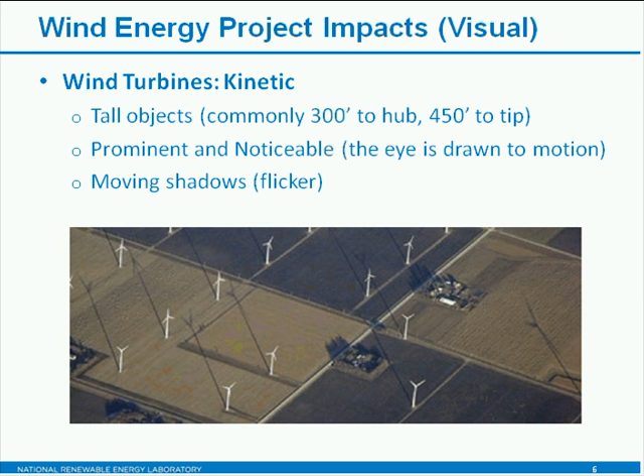As such, they also cast a shadow, and you can see these shadows can be long or short. At noon on a summer day, they can be very short and just oscillate around the tower, but around spring and late fall, the shadows can get quite long and cast a shadow that moves across people's property.

The good thing is we generally know where the sun is going to come up, and we can calculate with great precision where the turbine shadow is likely to fall in a certain area. This is a shadow map that shows, based on various colors, how many minutes or hours that shadow will be in a certain place, and it doesn't generally stray from this.

Then you get into the debate about what's the right amount of time for shadow flicker on somebody—sometimes it's zero, sometimes it's 50 hours. It depends on who the resident is, what the local guidelines are, and whether the person with shadow flickering on their house is involved with the project.

So a farmer who has that turbine on their property may be quite happy to have a shadow flicker, because every revolution, every shadow passing is another few cents, and it's a constant reminder that they're getting something for it.

So the mitigation for the shadow is proper siting. Because we know where these shadows are going to land, we can predict them. We can then put these projects or the turbines and site them specifically to avoid flickering on someone's home.

The other one is curtailment. So if we need to get close enough to a house where it's going to flicker, but we have other drivers to be there, there's the option to turn it off while that shadow happens to be right on that person's property or on their house.

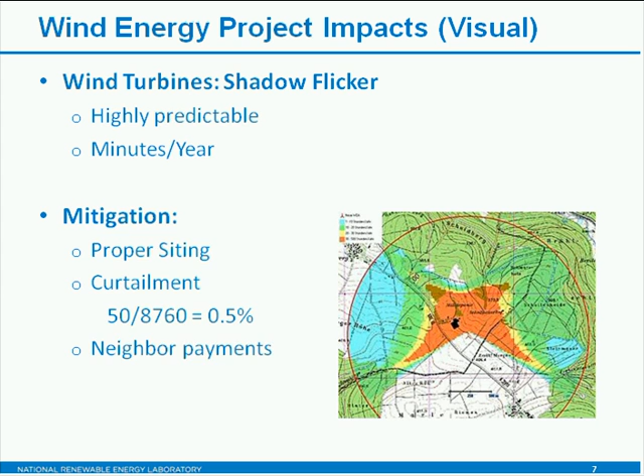So in terms of the machinery and moving parts of the wind turbine, there's a lot of components, and this cartoon hardly does justice to it, but it does highlight where the principal sources of sound emission come from. The bullets on the left are all the bits and pieces, in broad groups, within what we call the nacelle, Greek for boat, which houses the whole power assembly up top. That's where the principal noises are coming from on the machine side.

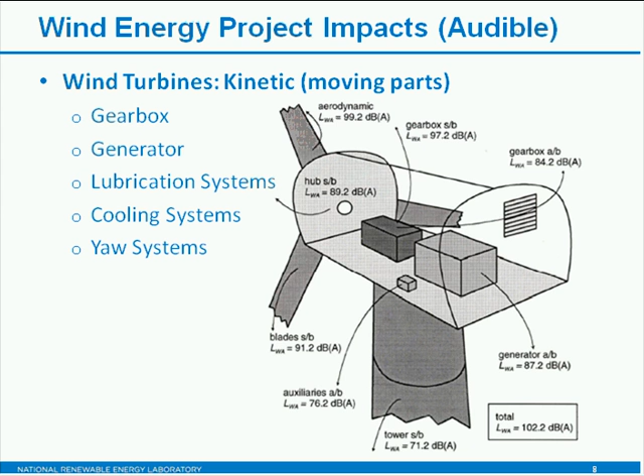And then there's the aerodynamic perspective. There are some cooling fans down at the bottom of the tower, but those are effectively inaudible. However, when you look at the system as a whole, because these emitting elements are so high in the air, 300 feet up, their actual contribution to the sound is relatively small. A big contribution to the sound is coming from the aerodynamic noise of the blade itself, and that's where a lot of the most recent research has come from.

That said, there are some things that when we look at a wind turbine, we don't even think about why it's designed that way. Why does it have 3 blades, not 5 or 2 or 1? These various design elements are actually all about sound - well, the first two are. And so the question of upwind versus downwind: turbines are upwind not because it's better, faster, or cheaper, but because it's quieter.

When the blade is downwind of a tower, there's this little wind tower shadow, and as the blade passes through that shadow, there's an audible thump. That was kind of a problem with early machines, which they mitigated to a degree using spiral figures on towers, or lattice towers and other elements, but eventually they just turned the unit so the rotor was on the upwind side of the tower.

Similarly, 2 versus 3 blades: 2 blades is a little cheaper than 3, but you have to spin the rotor a little faster to get the same amount of energy out of it. That means a higher tip speed ratio, meaning higher transport of the tip through the air, which is a little louder. So people have gone to 3 blades because it's quieter. It also happens to give a more even look to the eye, since it doesn't appear and disappear the way a 2-bladed rotor can, but really it's a sound issue that drove that design choice.

And then finally, the tubular tower, as we mentioned, that's an aesthetic choice.

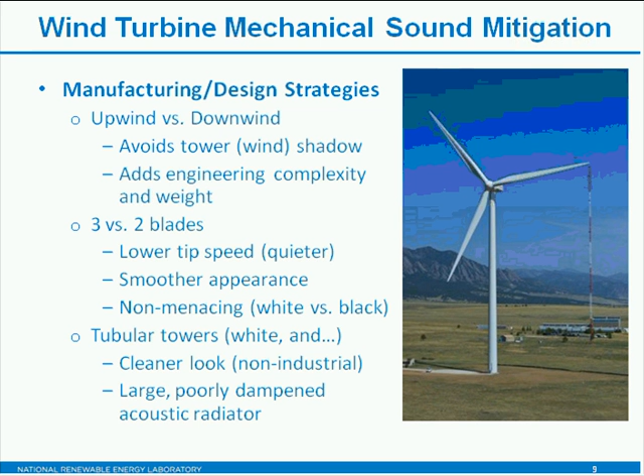And why would you do that? Well, when you see them from a distance against a distant tree line, you can't actually see the bottom of the tower against the trees. And there are those little measures that folks have done to get things going like that.

And then in terms of mechanical sound mitigation, these are interesting approaches that have been taken over the years that most folks don't even think about, but there's been a lot of effort put into how do we make these things quieter, because originally, as you probably are well aware, a lot of this development happened in Europe near people first. And near was like within hundreds of feet of a home, not thousands of feet. And so there was a lot of effort put into making these things quieter.

The first one was trying to figure out how to actually get the gearbox to be quieter, because the spur cut gears, which is in the bottom here of the two gears, let me just highlight them real quickly. This is a spur cut gear here versus the helical gear. Well, the spur cut might be less expensive, certainly for smaller gear elements, but it's louder.

And the way to remember this is that, you put your car in reverse, you're using a spur cut gear versus helical if you're in forward gear - it doesn't work so well with automatics, but it does a little bit. And you know exactly how much that machine whines when it's in reverse compared to going forward, and that's because you've got more teeth sharing the load in a helical situation. So there happens to be a fringe benefit with helical in that the gearboxes last longer, but they're also quieter.

We've also got these various isolators here, and this is a cartoon of a vibration isolator. And these we see all over the world, but we use them for attaching all the moving mechanical pieces to the bed plate and the other wind turbine components. And it's very effective at keeping the propagation of the vibration from entering the tower and acting as a large resonator.

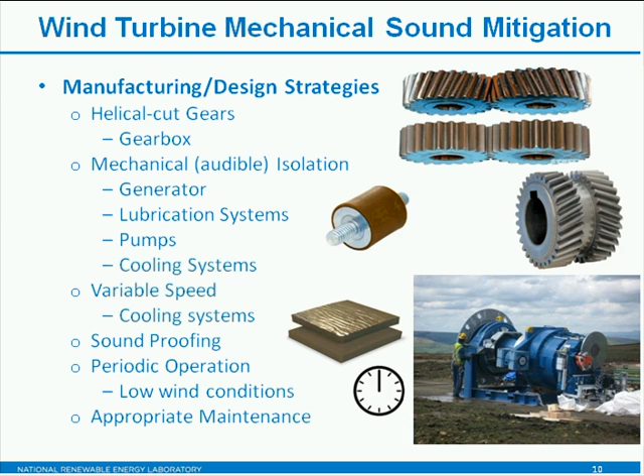And then appropriate maintenance. So there are certain elements of wind turbine that will make more noise when it's not properly maintained. But there's only so much you can do to reduce the noise from a wind turbine directly. You can't make it silent because it's a large kinetic machine. So one of the tricks then is to keep from upsetting the neighbors is to site it properly.

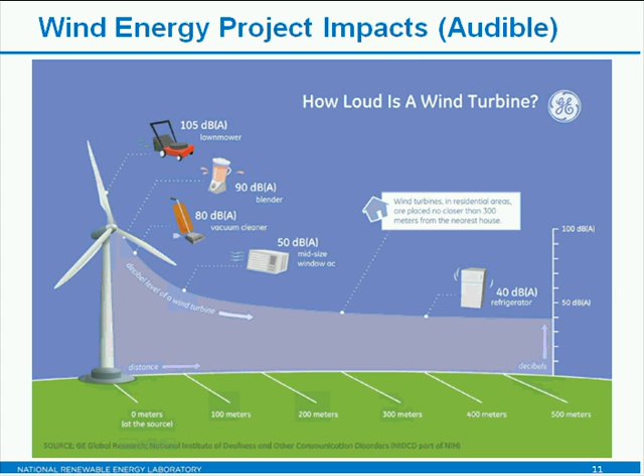And so we're looking to put these turbines sort of in where you get these diminishing returns. So once you get out a few hundred meters, then you're to where the sound level is pretty low and tractable, especially in comparison to background noise emissions. Most of you have probably seen these figures that other sources of sound emissions are, and we try to get it down to around the sound of a refrigerator heard from another room. So siting is really important, and sometimes you can't site it where you want to, and sometimes you can.

As I mentioned earlier, there are acoustic emissions from the blade itself, and the noise emissions from the blade go with the fifth power of the tip speed, the speed of the blade through the air. So by making a small change, like a 15% change in tip speed by lowering the rotational speed, which generally means making the blades longer, you can make the turbine quieter. A 15% drop in rotor speed ends up about halving the sound emission from that turbine. That's pretty good, but it comes at a cost, because now you have higher torque, since power is torque times speed. Lower the speed, increase the torque—you don't get it for free.

So people are doing that, and they also have low speed modes—when there are specific meteorological conditions where sound will propagate unusually far, some manufacturers will run the turbine at a lower tip speed at a certain production loss. In contrast, there are trailing edge improvements, and they've looked at various ones.

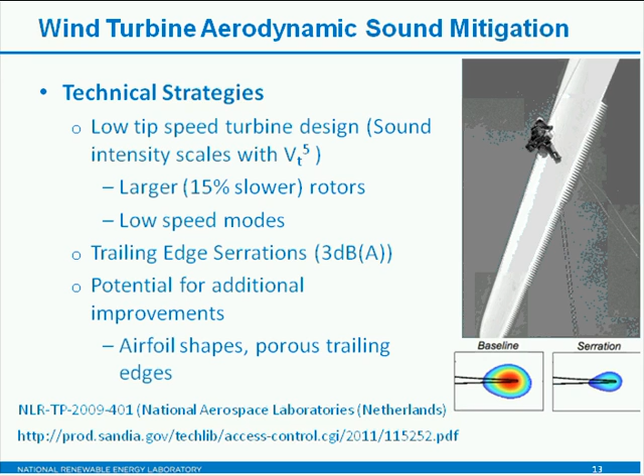I mentioned there are also conditions where sound propagates unusually far, and there's the human condition that we are incredibly perceptive animals—perhaps not as good as some other animals, but we can hear things a long way away.

The interesting thing is a lot of it has to do with our attention. If we're having a conversation with somebody, we'll miss somebody calling our name a few feet away. But if you walk into a restaurant trying to find a friend, somebody only has to barely whisper your name and you can hear them and find them. So a lot of that has to do with how you're feeling about the situation—when you're not connected to the project, you tend to be less interested in listening to it or seeing it. That's called the checkerboard effect.

You'll get one farmer who's quite happy with the wind farm and may be closer to a turbine than the next farmer, yet the more distant farmer is less happy about the nearby wind turbine—and that has a lot to do with being connected.

So that ties back to these interesting and innovative ownership models. Rick Vanderveen in Michigan has been pushing this model to good effect, where you come up with a revenue distribution plan that's independent, to a degree, of actually having a wind turbine on your land, so that everybody can benefit from the project. We're seeing this in the Northeast more in the form of neighbor payments. Those creative solutions are really important to investigate when you can and when needed.

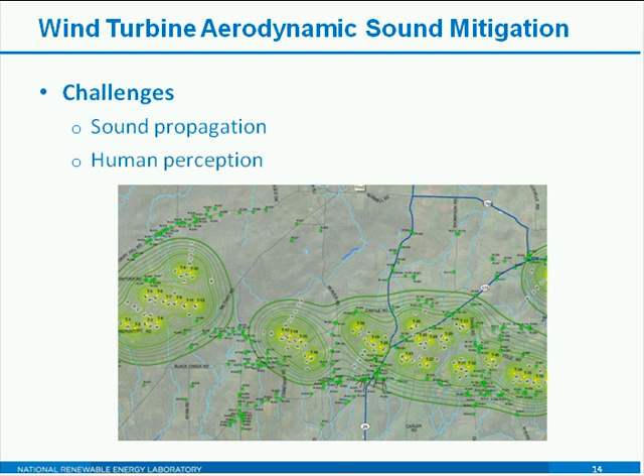So again, when we think about siting strategies, the trends we've observed are that developers will first look to follow the rule of law. If, in doing everything right, they still have unhappy neighbors, they'll consider payments in lieu of taxes to the neighborhood or town in general. They'll also look at these creative ownership models being played out in Michigan, Wisconsin, and other places.

And then following that, they'll move on to neighbor payments to acknowledge that there's different levels of impact depending on your proximity to the wind turbine. And again, that engages a neighbor, makes them feel like they're part of the project, and it lowers the annoyance level, which I think is an important thing.

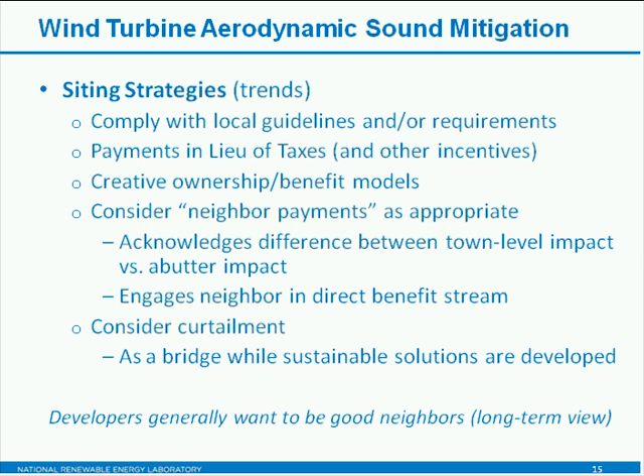Curtailment is kind of the last ditch. If you can't make it work other ways, then you curtail, but you're losing revenue. And the minute you start losing revenue, it's not in anyone's best interest, really.

So there are some other impacts to briefly glance across. Construction is another thing—it's not just the operation of the equipment, it's the installation. A typical crane can involve as many as 20 to 25 semi-loads worth of gear to come in, plus another crane to lift that crane, and sometimes that auxiliary crane can take a few truckloads of its own. There's hundreds of truckloads of cement that come in, roads that need to be built, fugitive dust, noise, hours of construction, and all that kind of stuff that can be a problem.

So a lot of it is good communication, and the better developers out there are really quite top-notch at communicating with the neighborhood about what they need to do to get the project in.

The industry is maturing pretty well in many regards. I don't know if you've been watching the front page about fracking and land leases and how unhappy some property owners are—we've moved well beyond that. We're really far beyond when developers were kind of shooting from the hip.

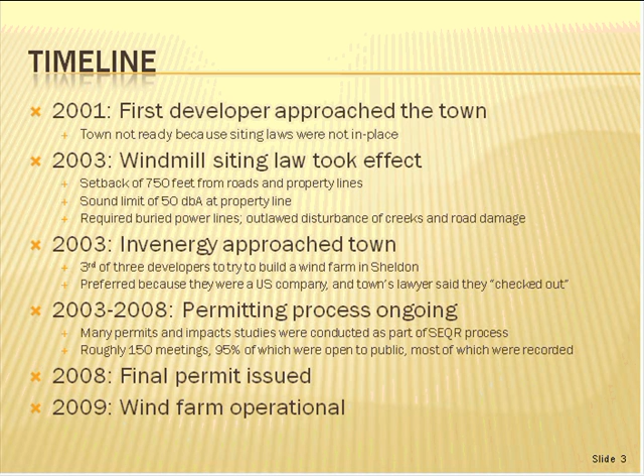With the project here in New York State, our Wyoming County Industrial Development Agency received a one-time payment of $2.1 million. This is 1% of the total cost of the project. The project cost $210 million to build here in Sheldon.

There are 38 landowners that site the 75 turbines, and they run anywhere from 1 to 6 turbines per landowner. We have 2 landowners that have 6 turbines. Total lease payments to the landowner are, for most, over $600,000 per year.

Non-participating landowners got paid if they were near the 1,200-foot setback. There were, I think, 8 or 10 landowners participating in that. There was a lease agreement for landowners that had power lines going across their property. They got a one-time payment settlement for the first year.

The wind company also, through SHPO, had to do some work on a historical building. The town owned a Queen Anne's two-room schoolhouse that we acquired back in the mid-'70s, a historical building. They renovated that for us - new windows, new heating system, new floors, new bathroom, fixed up the wall and a handicap ramp - at a cost of about $95,000.

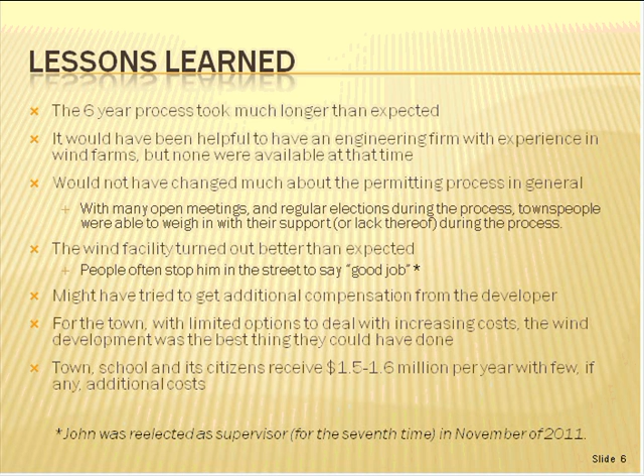Nils is Program Director at the Massachusetts Clean Energy Center, where he focuses on wind generation. In his role, he oversees the Mass Clean Energy Center's grant and loan offerings designed to support the development of wind energy in Massachusetts. He has over 25 years of experience with government-sponsored energy efficiency and renewable energy programs, and he's going to take us on a tour through experiences with mitigation steps taken by a number of wind project sponsors he's worked with over the years. Nils, it's all yours. Okay, thank you, Bob.

We'll start off with a brief description of the Massachusetts Clean Energy Center. We are a quasi-public state agency with a board of directors appointed by the governor. Our sole mission is to accelerate successful clean energy development and implementation in Massachusetts, while creating high-quality jobs and providing long-term economic growth in the state. We have 4 major program areas spanning the value chain for clean energy, from ideas in the laboratory through installation of renewable energy generating facilities. I work in the renewable energy generation division, and we have substantial experience with wind project development gleaned over many years through our wind energy support programs.

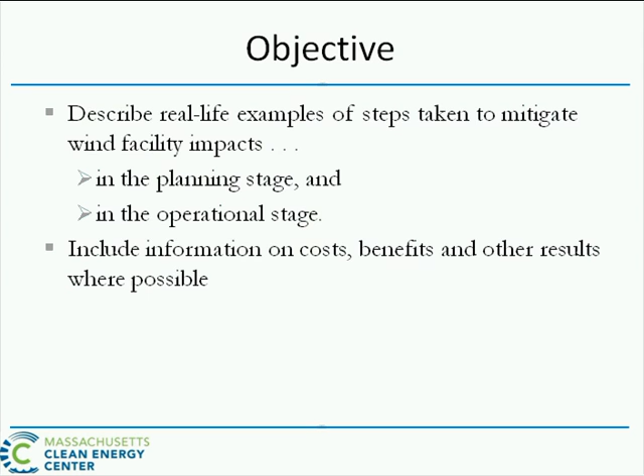So let's start with a look at how we at the Mass Clean Energy Center break down the wind project development process. It's a little bit artificial and structured because that helps us with our program structures. In real life, the development process is a little more fluid. We start with the earliest stage: site assessment and feasibility study. That's planning and seeing what will work, then doing more detailed studies, and finally you get into your permitting process, and if successful there, you move on to procurement of the turbines and construction.

As you go through these early stages, the project gets refined over time. The number, size, and location of wind turbines may change. This is the area where you really want to focus your engagement with the community, because this is where you can do your mitigating as part of your planning. From a developer perspective, you can do your ongoing analysis of the trade-offs you're making. If I have too few turbines, maybe my economies of scale have gotten so bad that I have to take some other approach with the project.

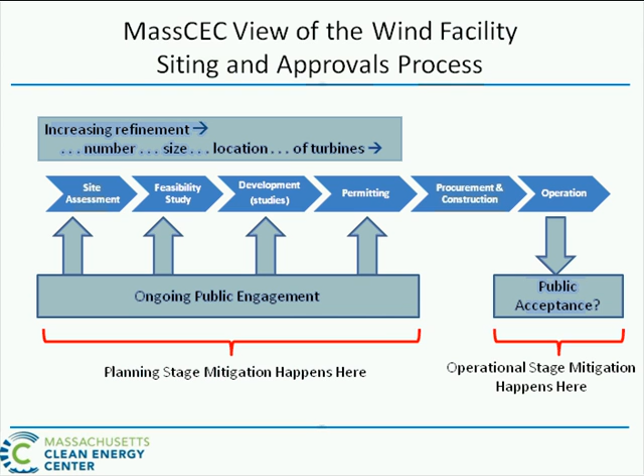But those types of decisions are relatively cheap and easy to make in the planning stage. Whereas if you wait until the operation stage, at that point public acceptance becomes a feedback scenario. If you have to make operational mitigation there, you'll incur costs that probably were unanticipated, and that can affect the overall financial structure of the project.

So let's first take a look at some examples of mitigation steps taken in the planning stage, because they're the most important. The most fundamental aspects of a wind project: how many wind turbines, where will they be located, how visible will they be, how close will they be to me.

Those are things that can be varied at this stage. The obvious mitigation techniques are reducing the number of turbines, changing their location to increase separation distances, and importantly, updating and refining the acoustic and shadow flicker studies to report back to the community how the project changes will affect and hopefully reduce impacts on the community. The results: reduced acoustic impacts, reduced shadow flicker, generally increased comfort among neighbors, and all that feeds into improving the likelihood that you'll get your permits, which is what the planning stage is all about.

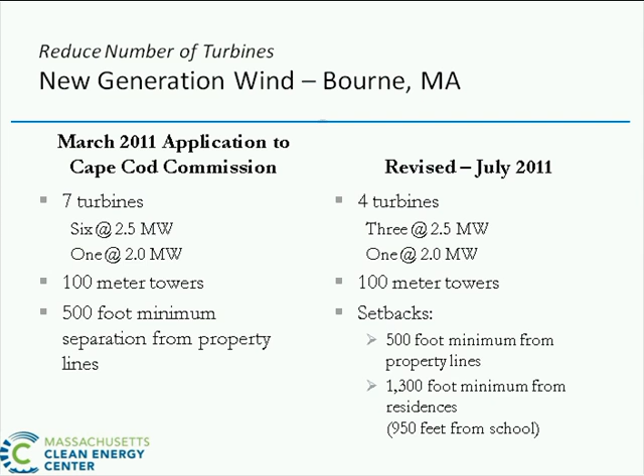The outcome, though, of this project change and concession by the developer is unclear, and it appears to be a little bit tenuous at best. The project is still under review by the Cape Cod Commission, but the subcommittee that's been reviewing it has made its recommendation to the full commission, and it is that the project not be approved. We'll learn the ultimate disposition when the full commission meets in January, so we'll have to stay tuned for that.

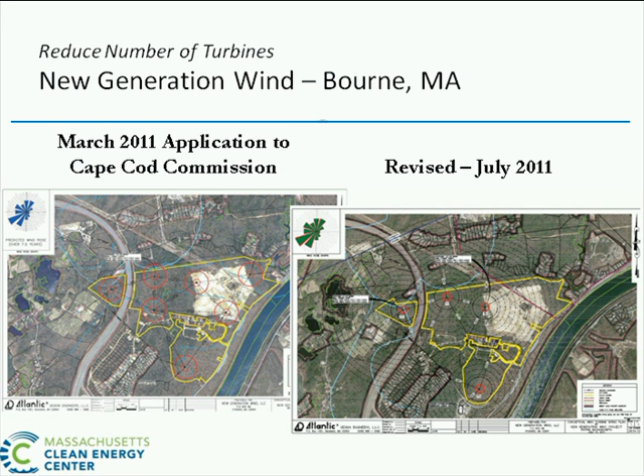Now let's take a look at another project in the same general area, southeastern Massachusetts. This is a project sited on some cranberry bogs. The developer is Beaufort Wind, and the project is sometimes called Bog Wind because of its location. Beaufort Wind filed its application to the Wareham Zoning Board of Appeals back in September of 2010. They proposed a total of 8 turbines, 5 on these 2 bogs called Barker and Parker Mills. Large turbines, maybe the current standard for today, 2.5 megawatts, 100-meter towers. They did propose at least 1,400-foot separation from residents.

But when the project was proposed, there was a great backlash in the community. Efforts were launched to modify the local bylaw, and the process dragged out. During that, the developer took the drastic step of reducing the number of turbines from 8 to 2, and increased the separation from residences to at least 1,700 feet. They selected that distance because it was consistent with a threshold established by the Cape Cod Commission beyond which a project was presumed to be acceptable. So this was a very conservative approach taken by the developer, in response to vigorous opposition on the basis of acoustics, shadow flicker, and concerns about decreases in property values.

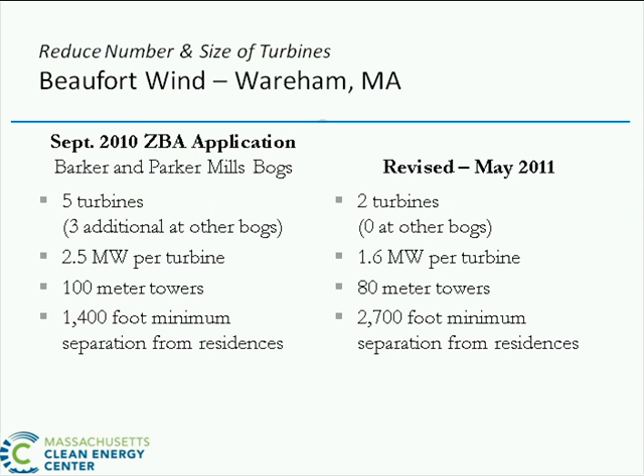Just a point of clarification: you mentioned 1,700 feet, and the slide said 2,700 — could you clarify? Yeah, excuse me, 2,700 feet is the revised distance, and you can see that here.

At the north area of these bogs, the red circles indicate the 3 original turbine locations. The green circle is the revised location, with increased separation from the residential area to the west. It was the same type of scenario on the image showing the southern portion of these bogs.

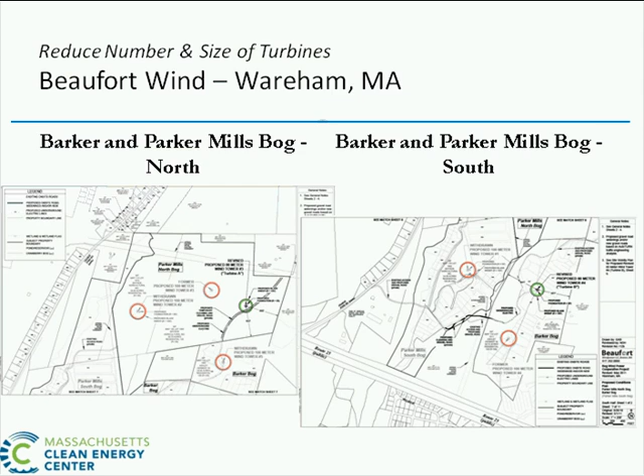Before getting to the ultimate disposition, this project had a long delay because of the bylaw change efforts in the town. It seems to have recently been resolved, so I expect the Zoning Board of Appeals will take it up again and rule on these 2 turbine locations, at least.

Now let's switch gears and look at some mitigation steps that were taken to avoid impacts on air operations. Now it's not neighbors and residences, but an airport. The project was evaluated and proposed by the Massachusetts Water Resources Authority. They have a very large wastewater treatment plant on Deer Island, out in Boston Harbor.

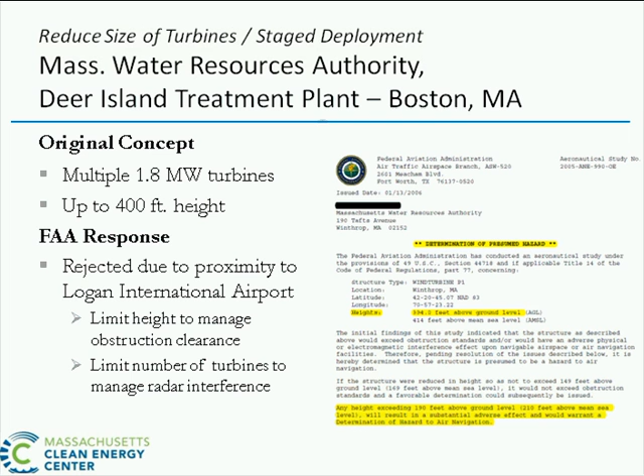The original concept was multiple wind turbines in the 1.8 megawatt range, up to 400 feet high at their maximum tip height. The FAA response was that, given the proximity to Logan International Airport, they wanted to limit the height to manage obstruction clearance. They also wanted to limit the number of turbines because they were concerned about interference with the airport surveillance radar. On the right here is an example of one of the determinations of presumed hazard that the FAA will send to a project like this — you get one of these for each proposed wind turbine location.

So negotiations ensued. The FAA did ultimately accept, beginning with 2 wind turbines. They said they would allow 2 turbines to be installed and then evaluate their impact on the airport radar. They had to limit the height to 190 feet above ground level, though.

Well, the MWRA, as they're called, got innovative. They installed 2 600-kilowatt turbines on what are relatively short towers for a turbine of that size, approximately 35-meter towers. They could get away with that because the open water area is to the south, the west, and even the northwest of this site, and that's where the prevailing winds come. So interference from these egg-shaped structures in the back, which are digesters for sewage sludge, wouldn't be so much of an issue.

These 2 turbines were installed and operational in late 2009. It really only took several months for the FAA to decide they were comfortable with the radar issues, and they allowed a third turbine to be installed. That went in last year, and the FAA indicates that they're now ready to approve a fourth wind turbine.

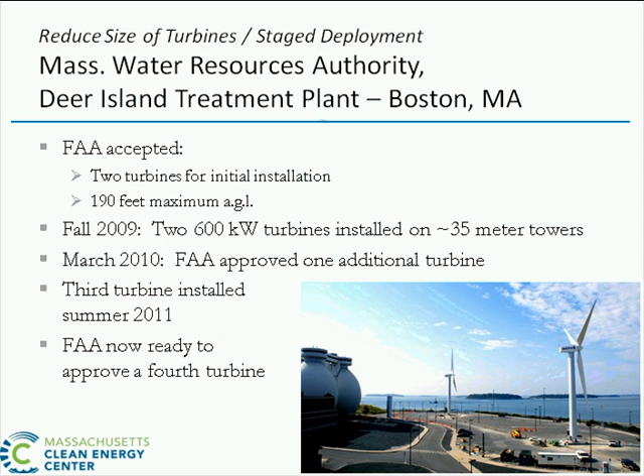That's all well and good for the Mass Water Resources Authority, but they are a little frustrated because it would have been more economical for them to install multiple turbines at the same time, for crane mobilization costs, for example.

Now we want to switch gears a little bit and look at a couple examples of mitigation of impacts that was taken after a wind turbine was in operation.

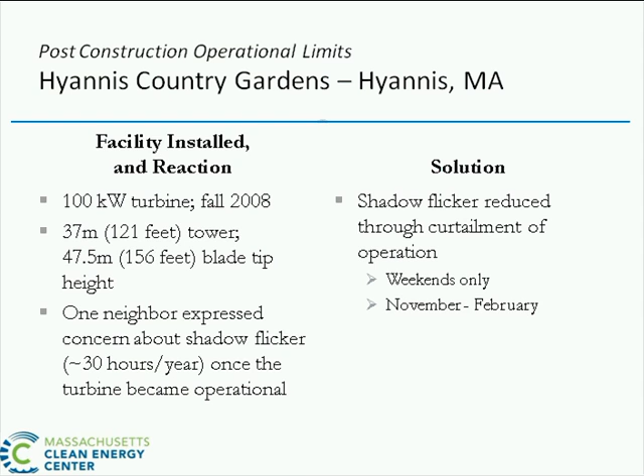So the shadow flicker effects don't extend too far, but there was at least one complaint after the turbine went operational, and the owner elected, or maybe was forced, I'm not sure, to mitigate the impact by curtailing operation at the early morning hours when this flicker was a problem. It didn't have too great a financial impact, but you could imagine that if a larger wind turbine was installed at this location, the flicker impacts would be much greater, and the amount of mitigation might become sort of untenable.

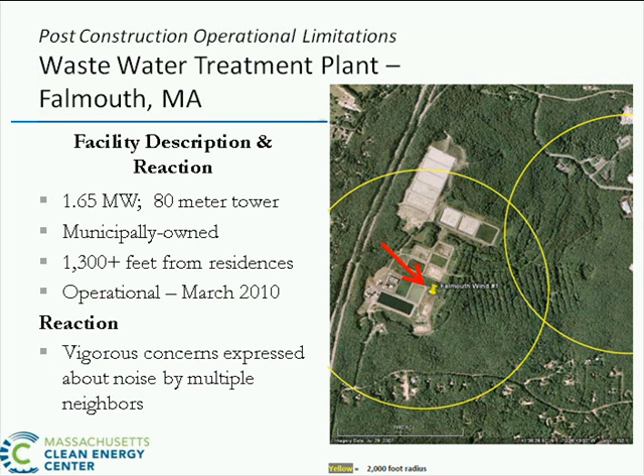The yellow circle indicates a 2,000-foot radius from the project. You can see there are a couple areas that have residences within 2,000 feet, the closest of which are about 1,300 feet. This project encountered vigorous concerns about noise expressed by multiple neighbors not long after it became operational.

The municipality, the town of Falmouth, to their credit, did respond very well in terms of engaging with the neighbors, undertaking some additional acoustic monitoring and analysis. Some of that had back and forth with the Mass Department of Environmental Protection. Based on this, they implemented some temporary measures.

Interestingly, they initially elected to curtail operation around the cut-in wind speed. The analysis seemed to indicate that the turbine would be more audible at those lower wind speeds. In fact, that didn't really make much difference according to the abutters. Instead, they said the turbine was most audible and most annoying to them at high wind speeds.

So the town implemented some curtailment at high wind speeds, and that did seem to provide some reduction in the noise. But as you can imagine, the high wind speeds are when you generate most of your electricity, so the economic impact of a long-term curtailment at those speeds might be difficult for the town to manage.

This is a work in progress. There are additional evaluations going on by consulting firms looking at what the cost of removal and relocation of the turbines might be, additional operational curtailment, and even exploring some sound mitigation at homes—soundproofing, vibration proofing, things like that. The Mass DEP is doing some additional monitoring.

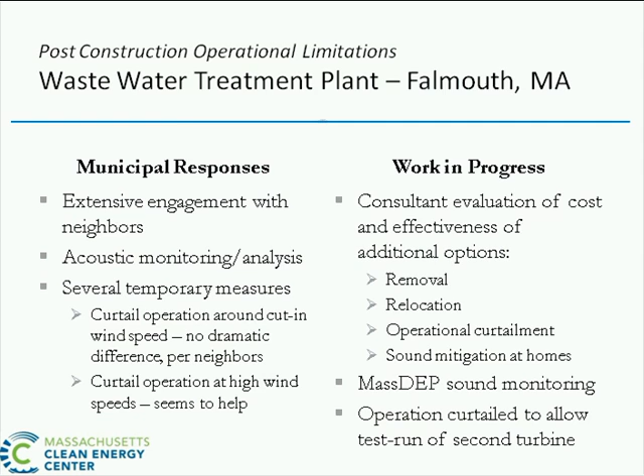So just before we move to Fox Island, with Falmouth, all this additional analysis will be feeding into an action that would probably be voted on at town meeting this coming spring in Falmouth.

And for the last project, let's look at the Fox Islands Wind Project up in Vinalhaven, Maine. This is a 3 wind turbine community-owned project that became operational in 2009.

This project has a lot of support, but some strenuous concerns have been expressed by multiple neighbors about the noise. Interestingly, they're not the neighbors that are closest to the project. Some are as far as 2,600 feet away.

The Fox Island Cooperative has taken an aggressive stance in responding to these concerns also. They've implemented operation in low noise mode with this type of turbine. That is an option—you can slow the rotor down. You pay a penalty on the electrical output, but you do get a reduction in the noise output.

There's also some work in progress. You saw in Charles Newcomb's slides the serrated edges added to the trailing edge of some wind turbine blades.

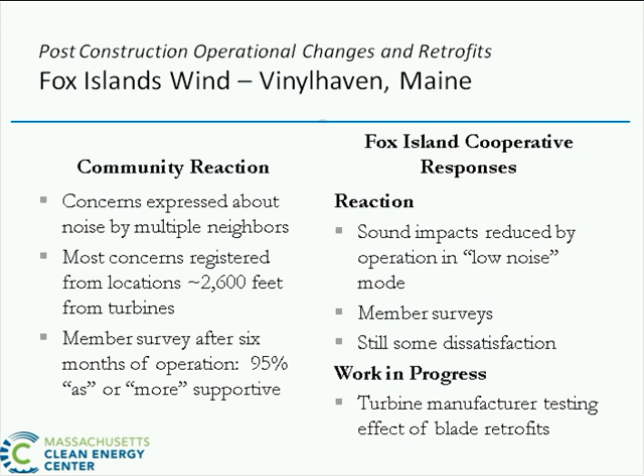That technology is being beta tested by General Electric on the wind turbines at Fox Island. There's been a lot of activity in this area on this project, and the Fox Island Cooperative hopes to publish all these reports early next year. So that would be good to see how that all shakes out.

For some conclusions and observations: do the rigorous analysis, and do it early. It can help you avoid unexpected impacts. Focus on the planning stage for your mitigation wherever possible. Engage the public early and often, and even after you get through the permitting process, let them know before you start construction, because that may have been part of the issue in Falmouth.

Steps taken to mitigate impacts will certainly affect project economics if they're too drastic, so you have to take that in mind. And finally, the impacts and the mitigation steps—especially with sound and visual—it's in the eyes or ears of the beholder, and in some cases there's no right answer for everyone, so that's a challenge.

So thank you all very much.